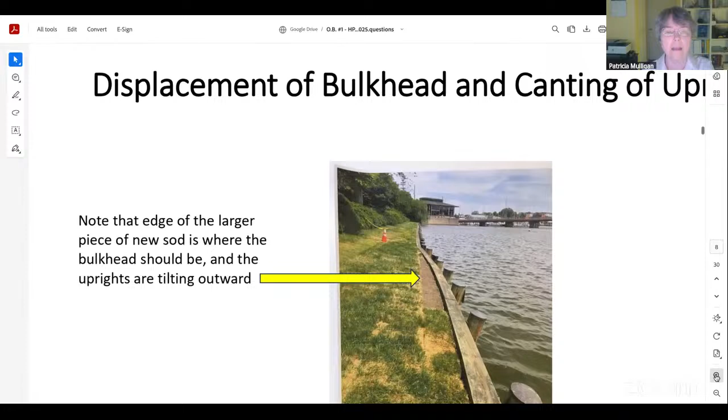Just showing more, we can see from the edge of the sod how far out that bow has moved, because the bow should be back next to the edge of the sod. This tilting outward is caused by the snapping of the tiebacks that come out of the uprights. I think the last inspection, done in September—and Joe can speak to this more—estimated that half the tiebacks have snapped. Let's come to the next.

Now we're in August. Here's another West Bank flood picture. You can see where the bulkhead is there. Let's keep going—I really want to get up to the most recent pictures for discussion.

Just the bow is worsening, the uprights are canting outward into the water. Here's the West Bank bulkhead. Now, when we began this project, that was perfectly straight. But between '22 and '24, we started to see slight bowing even on the western bank, with erosion behind the wooden bulkhead. It's alarming because we've seen that degree of bowing on the other shore two to three years ago, so we know it will increase. Can we come to the next, please?

I don't mean to belabor this because it's shown better in later pictures, but just showing the difference between '22 to '24. Can we come to the next, please?

This work was done in September. I noted to the order that there were 2 more bowed sections on the northern bank, closer to the bridge. My concern was they're starting to look like the worst bow we have now did in 2022.

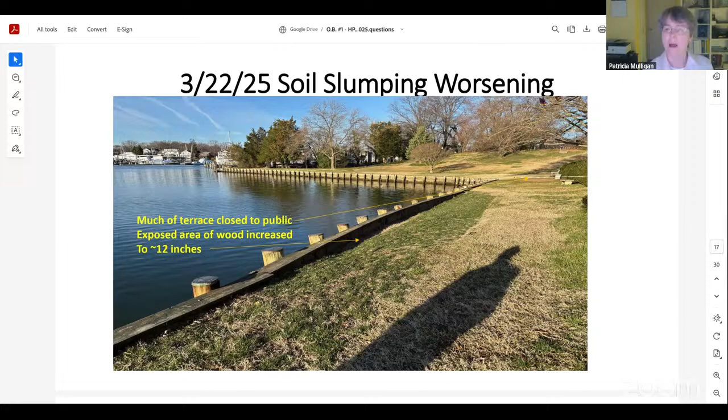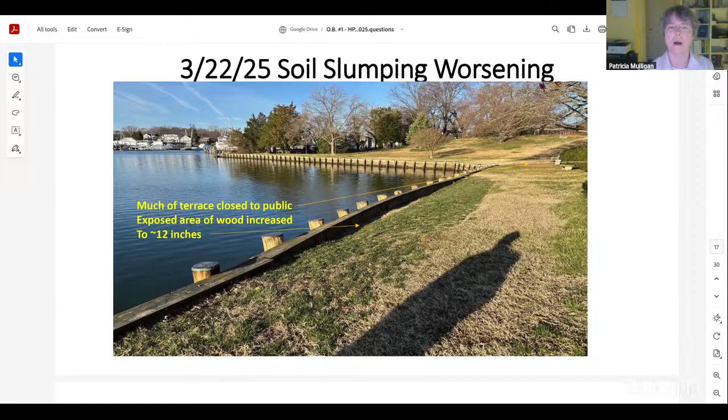I don't know if there's any reason you would like me to go over the backup charts. I think they should be explanatory. I'm seeing no's, so I'm not going to take up your time to do that.

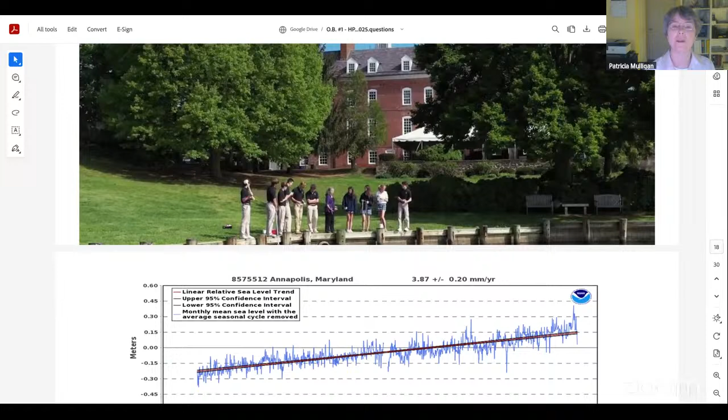I just point out that students used to stand on the bulkhead in the environmental sciences classes to do water sampling, catch fish, measure the fish and then release them back. They don't do that now. We've closed the bulkhead to the students. There's police tape up over part of the area. We've closed it to the public too, because we're worried about it continuing.

So it's not necessarily to be surprised. So if there are no questions about these charts or about the background, I will stop talking and let Joe take over talking about the oyster establishment.

Before we move on, let me clarify one thing. Mr. Berg is only going to speak about the oyster reefs plan for the oysters, correct? Also a little bit on the planting plan, but that is still extremely preliminary. If you want to hold that off until we're more permanent, I'd understand.

Otherwise, I think Joe has the materials on the oysters.

If you want to talk about the planting plan, it's so preliminary, I would encourage you to be very brief. I also want to thank you for the photographs - they're very helpful, very valuable for us to see. But there is no debate, I don't think, among the commissioners or the staff that something needs to be done to preserve the shoreline. In all the time we've spent together, I've not really heard you address the relevant parts of the guidelines, and that is crucial to our approval process.

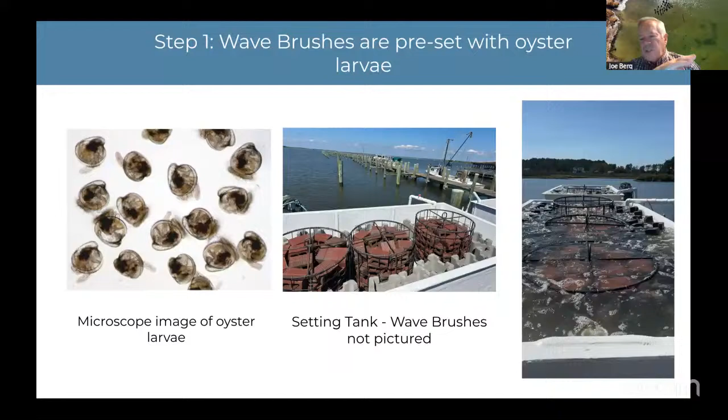This is the setting tank at Hooper's Island. You see they put the substrate that would be set with oysters in the tank, then they put the oyster larvae and water in and agitate it to keep the larvae alive. The oyster larvae glue themselves to these substrates, which are then harvested and transplanted. You can go to the next slide.

This is just a little bit more info. We're using a marine contractor we've worked with before, and they strap these wave brushes, which you haven't seen a photo of yet, and lower them into place - that's really how they're installed. All the work is from the water on a barge, and the barge is not up against the bulkhead because this is a long reach excavator. Next slide.

These are just a couple of photographs of this wave brush set with oysters in Virginia, where the oysters can grow above the tide, as long as it's not above the high tide. Next slide.

One more, I'm sorry. So it looks like this is as far as it'll let me go. I'm trying to scroll down past this. Well, that's okay, you can exit this. I don't know if there is another one.

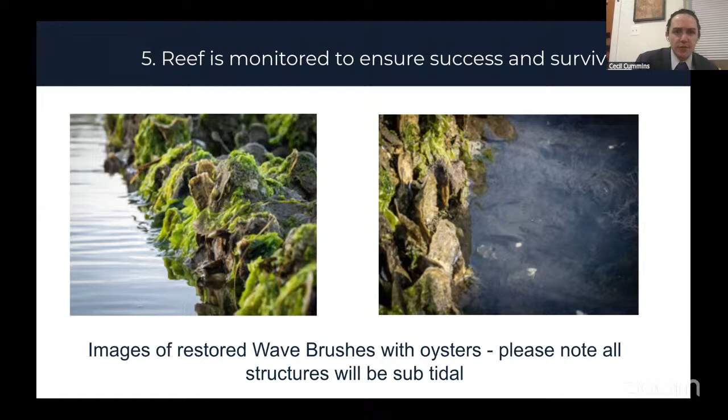I think you're right, I think 5 is the end of it. If you can close this out and open the wave brush, it's a single image.

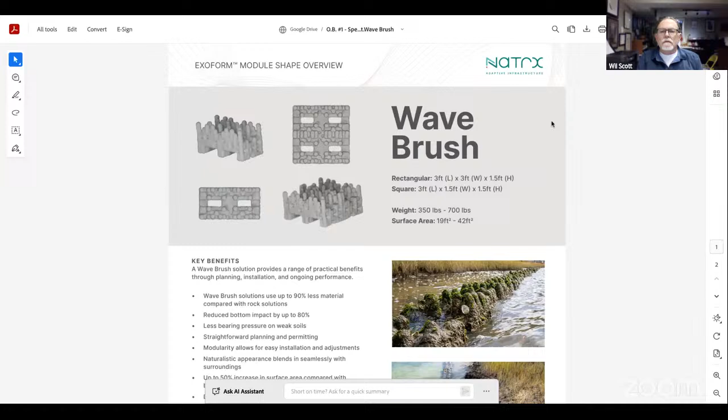While we're waiting for that, Mr. Berg, again I think that this is all very useful and important for us to evaluate what your final proposal will be. But my real question at this point is: is the installation going to not disturb the historic shoreline and shore itself? And is what you propose for the oysters going to remain invisible during all normal water conditions? Yes.

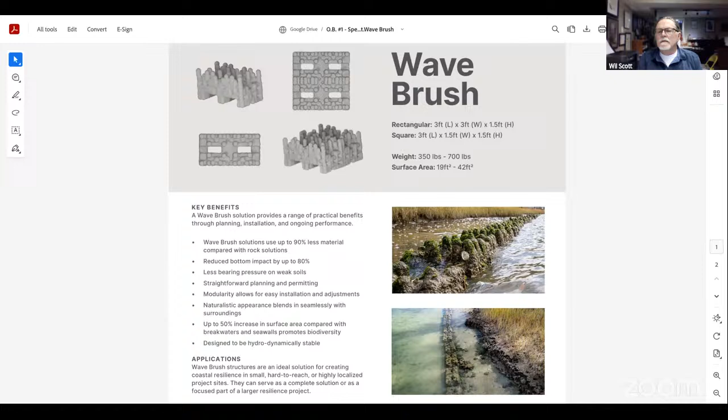Quite an audio delay here. For oysters to establish well, we don't want them to be within 2 foot of mean low water. We want them to be deeper than that. Just like us, they don't want to be freezing in the winter. Yeah, so it's important that that's good.

Somebody probably has two things, Joe, I don't know if you have it on your phone and on the computer or something, but there's probably 2 microphones picking you up at the same time. Cecil, I cannot tell, it's actually only Joe's it's happening on. So somehow Joe has double audio. I think what he also hears is the source of the echo. And Joe, that's usually caused by 2 microphones picking you up. I don't know if you have it on your phone and computer or something. No, I just have it on my computer. Wow, that's, yeah, so no one else is having this echo.

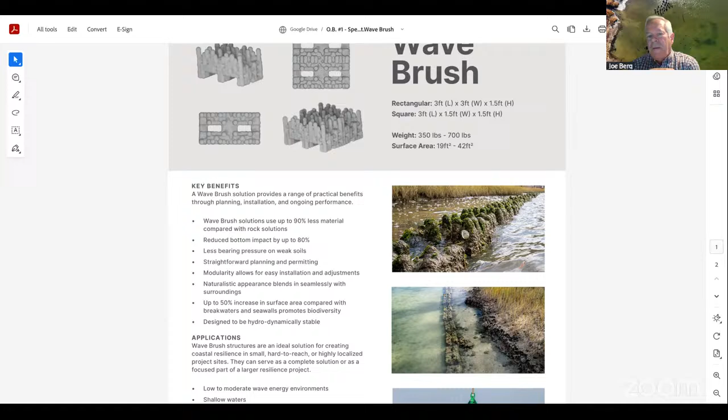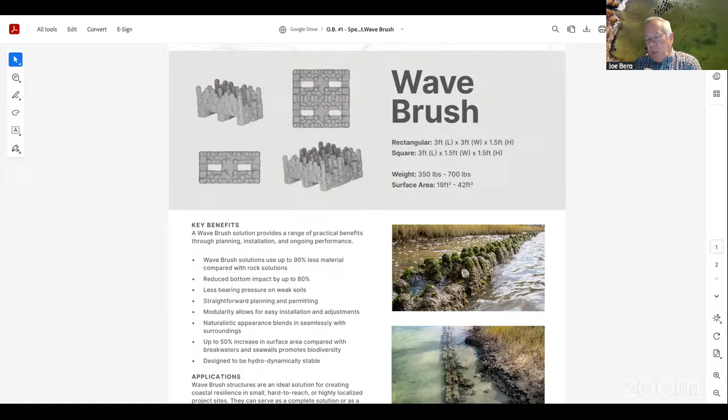The top of this slide shows what these wave brushes look like, and there's some details there: their size, their weight. The beauty of these structures is rather than just being a simple rock on the bottom that's a hard surface the oyster can set on, these structures have a third dimension. They're 18 inches tall with these almost hoodoos, if anybody's been out west. So you get a lot more surface area for the oyster to set on.

So over time, when the oysters survive and they spawn, the revetment that these structures are placed on, which is all rock, will become encrusted with oysters. So the long-term...

Structure of the shoreline. I've been removed, huh? No, I hear you, I see you, Joe. Okay Joe, I just heard what the issue was. You had been signed on twice somehow, removed from the webinar by the host, so as long as you can still... I'll just ignore this.

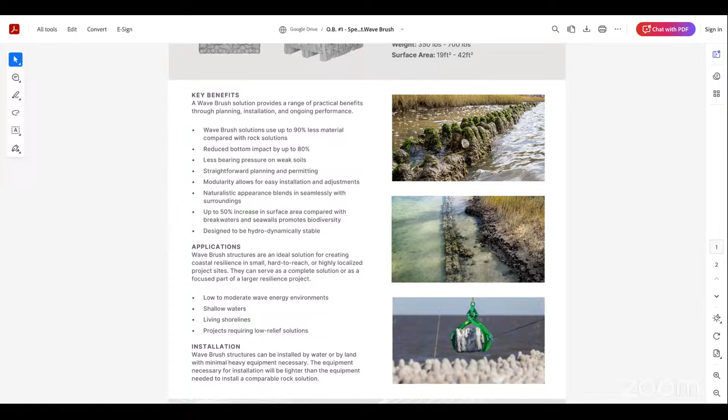I won't, Mr. Berg. Yes, there was 2 sign-ons, I just removed one of them. You're still in the meeting. Okay, that should get rid of your echo though. Oh that's great. Oh, pardon me. Oh, here I am. Okay. Pardon my language. No problem.

The beauty of these wave brushes is you get this third dimension, so a lot more surface for the oyster to set to. And then once these spat-set structures are placed on the rock revetment that is holding the bulkhead in place so it doesn't continue to rotate out into Spa Creek, as spawning proceeds, that remaining rock will be attractive hard surface for spat to set on. So over a decade or so, we would expect to see encrustation of the total revetment below.

We're saying minus 2.5 foot, which is 2 foot below lower low tide. That way it's not like they're sticking up like they do in Virginia. They'll all be underwater, but that rock revetment is now, instead of a bunch of loose rocks that are just held in place by gravity, they'll be cemented together by oysters. So it's a long-term solution. And oyster reefs, of course, support fish, support a lot of other organisms.

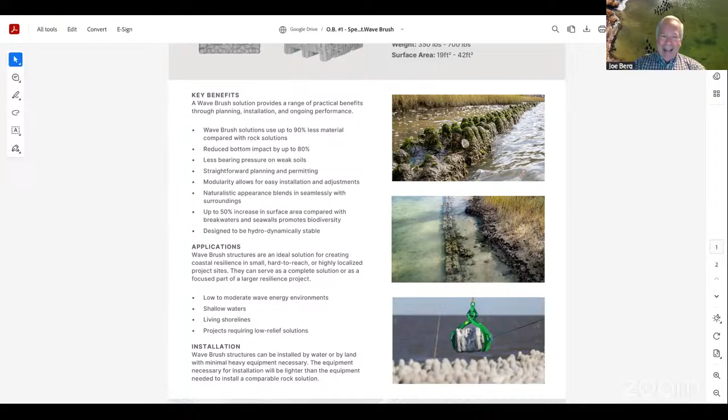It might be helpful if you have patience for it, it's like 7:58. So I know 7:39 is sort of a target, but I'd be happy to do a quick run through on the planting plan, which is the PDF that's in there.

I will defer to my fellow commissioners, but as I said a few minutes ago, if you're still going through a lot of decision making as to what the plan should be, I would really save that until you have something that all parties on your side have agreed to.

Well, so just in response to that, the structural elements of this project have been permitted by the Corps of Engineers and have been approved for permitting and submittal to the Board of Public Works by the Maryland Department of the Environment. So the design is the design.

But the planting plan is something that Pat and I have been going back and forth with, and we respect the membership on your organization, and we were actually going to inquire about what the preferences would be for both demarking the alignment of the historic seawall, as well as we know that the shrubs that have been planted there for a long time are dying now.

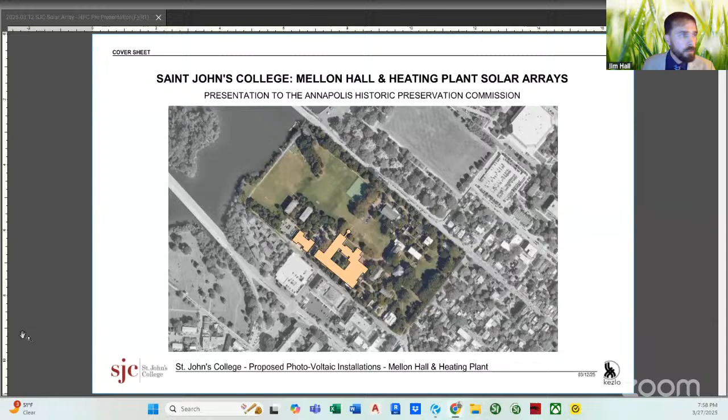Okay, let me get my screen shared here. And if everyone can see my screen currently.

Thank you very much for your time. We greatly appreciate this opportunity to speak with the HPC commissioners and staff about our proposed project, involving photovoltaic arrays on top of two separate buildings at St. John's College, Mellon Hall and the adjacent heating plant. My name is Jim Hall, project architect with Kezlo Group. With us we have Ali Gontang Highfield, Vice President of Finances and Operations and CFO at St. John's. John Davis is also joining from St. John's College, Director of Campus Facilities and Projects. Also joining is Jason Winters, Principal Architect at Kezlo Group, and Dante Balasone, another project architect at Kezlo Group.

We're excited to present to you here today as a pre-application, and looking forward to discussing your thoughts on our proposed project's feasibility, and any recommendations for additional information we may need for our submission for public hearing. Right now our targeted plan is to move forward for a presentation during the June 10th public hearing. That is a bit of a moving target for us; we have a couple other items trying to get lined up, as we'll talk about further along in this presentation.

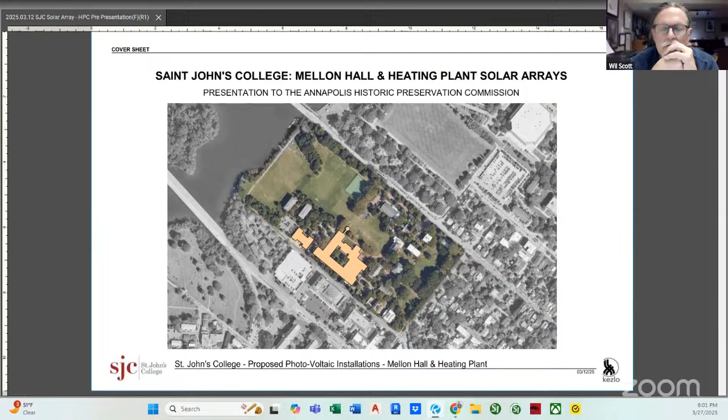At this time, I'd like to hand the presentation briefly over to Ali to introduce the project a bit and St. John's impetus for the project. I'll be very brief, and then I'll turn it over to the capable hands of Jim Hall.

As you mentioned, we actually did present this as part of our Mellon Hall renovation years ago, back in 2021. We did remove it at the time. The cost was really out of our reach at the time, but we recently had the opportunity to apply for a grant from the Maryland Energy Administration. So we did submit for that grant, and we were actually awarded it. All of this is obviously contingent on the approval from the city and the HPC, as well as MHT, since it's a state grant. But we really appreciate your time and effort.

The city's been wonderful partners to the college, and we're very excited at the possibility of reducing our carbon footprint and adding some sustainability features so that it'll help us with our very large utility bill. It will help us with recruiting students. All of these things are wonderful things for the college. So we're very happy you're helping us with this pre-application, and I'll go ahead and turn it right back to Jim Hall. Thank you, Ali, appreciate it, and thanks for the sum up there.

As Ali mentioned, the MEA grant that was awarded was specifically to fund the two arrays we're talking about here, but that doesn't mean other clean energy initiatives aren't being considered around campus. The grant actually comes in three parts: the design of the array being one component, a student internship program being another to allow St. John's students to learn about solar design and clean energy. We're also developing what's called a campus clean energy master plan. The idea behind that is to identify other potential clean energy initiatives that may be appropriate for St. John's, which could include a solar array installed somewhere else on campus, or a geothermal well, or any other kind of clean energy initiative. We're in the very beginning stages of that process.

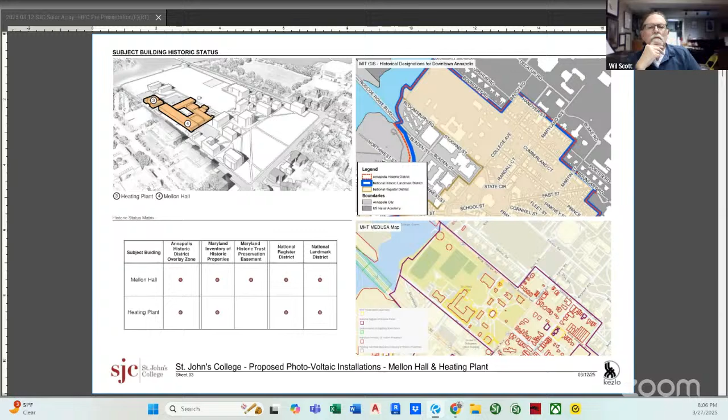On these next few sheets, we wanted to outline some of the guidelines and standards that appear to be governing this proposed project, basically a rooftop array on both buildings. Obviously, we'll be focusing more on the ones centered for Annapolis, but understand that being in the historic district, both buildings are subject to the Annapolis Historic Design Manual and Guidelines, which then references the Secretary of Interior standards for rehabilitation.

On the Maryland Historical Trust side, their easement process focuses more on the Secretary of Interior standards for the treatment of historic properties. A lot of these documents have very similar language and very similar requirements regarding rehabilitation and other preservation efforts. So some of these guidelines that we've listed here are duplicative or kind of repeat themselves, but I wanted to go over some of the pertinent items, looking forward to having more of a conversation on.

The first of which is what we call this project. It appears, looking through the Annapolis design guidelines and manual, that this would be called an alteration that would be sensitive to historic buildings and streetscapes. On the Secretary of Interior side, this seems to want to fall into the category of a rehabilitation, and I just wanted to get confirmation of that.

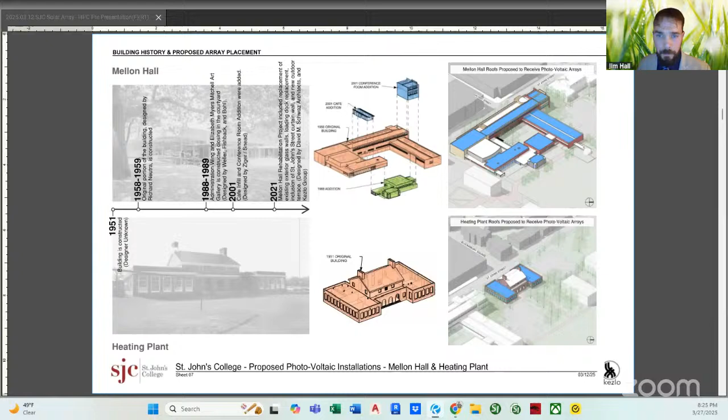There are several advantages to this. One is that we minimize the amount of penetrations through the roof membrane, which invites less opportunity for any future leaks. Additionally, the ballasted system places the panels on a slight angle, about 5 degrees, which is important because it creates a more optimal angle with the sun, allowing them to be more efficient. However, it also provides an opportunity to shed water.

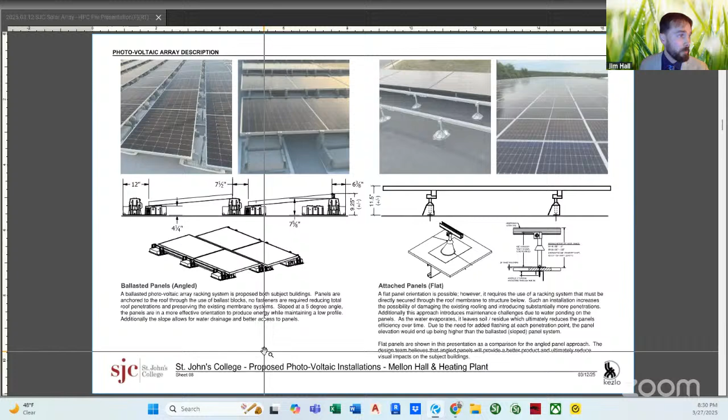Moving on to the other equipment associated with these arrays: from the rooftop panels, the direct current produced is fed through a series of metallic conduit. Those then penetrate into the roof or through the building envelope, down into the electrical room, where they're fed to a series of inverters. Those inverters convert the energy from DC power to AC power, which is then fed into the building or back out to the incoming service line through a combiner box, and ultimately to what's called a non-fused panel.

So the elements outside the building consist of the arrays themselves, some conduit and penetrations at the roof, and the non-fused panel. That non-fused panel is about 10 inches by 28 inches by 50 inches, and it's designed as a basic emergency shutoff. By code, it's required to be mounted on the outside of the building at grade and accessible at all times.

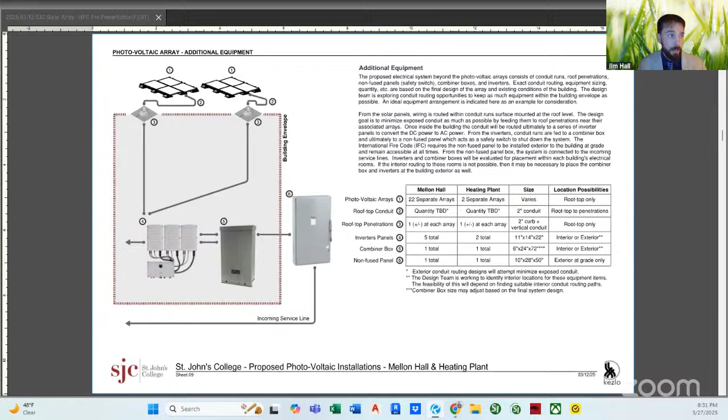So this is the proposed array at Mellon Hall currently. We're placing panels on some of the original building roof areas, as well as several of the additions. In total, this system consists of 22 separate arrays and about 452 panels. Using the ballasted system at that 5-degree angle, it's capable of producing roughly 300,000 kilowatt hours annually.

Does each separate array require those conduits and panels individually, or do they all flow to a central location? They would all flow to a central location. The conduits would need to be designed to interconnect these panels, and we're looking at ways to route them over the roof, drop them down as quickly as we can, then through the interior of the building to a mechanical and electrical shaft, down to the basement level where we're proposing this equipment goes.

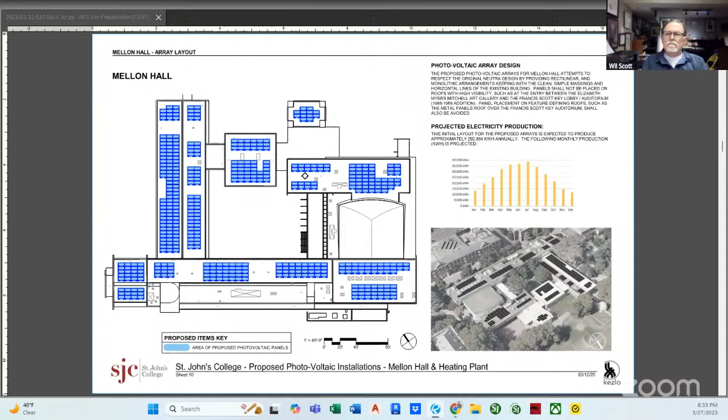And then lastly, there's a desire to place some array panels on top of the Mitchell Art Gallery as well.

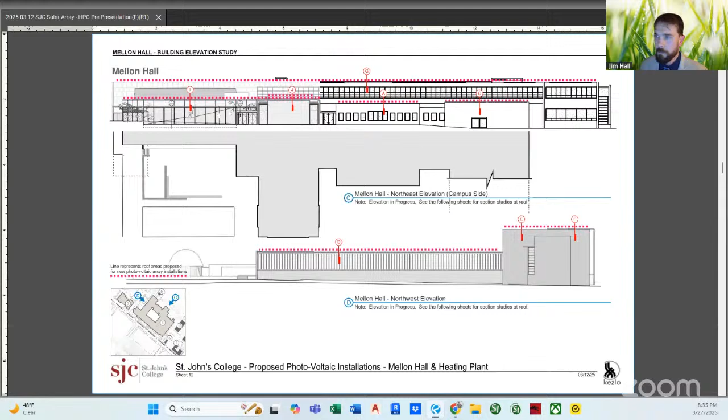This is where the study exists, talking about the relationship of the panels to the various different parapet heights. As you can see, as I mentioned before, the parapet heights range from about 6 inches in places to around 4 feet.

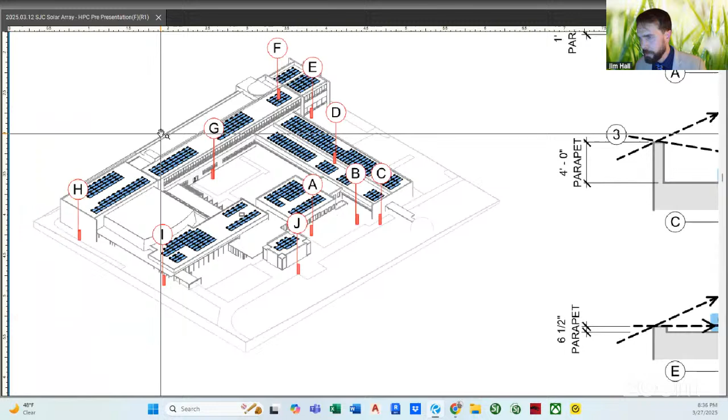I'll zoom back out on this slide, but I wanted to zoom in here to make a point. This is our array in each one of the locations that we've studied, and I wanted to point out that the array would only be higher than the parapet walls at locations E, G, H, I, and J.

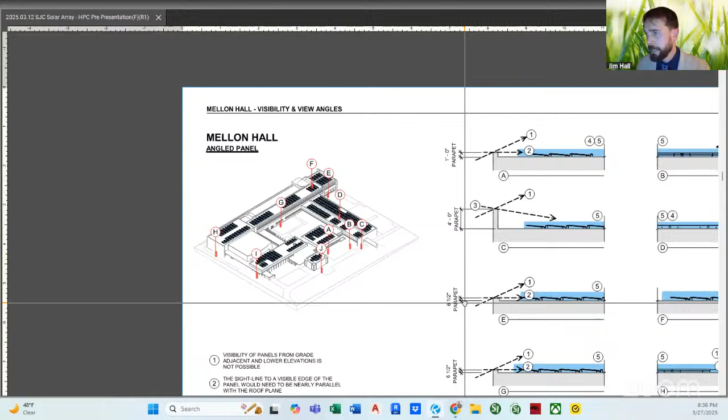That being said, I'll try to center that again. In each of those locations, due to the relative height of the array, you almost have to be level with the top of the parapet wall for those to become visible. In all other instances, the arrays are not visible unless you are much higher than those parapet walls.

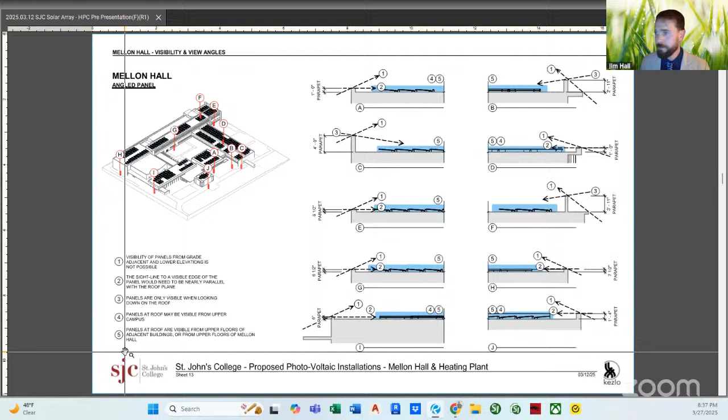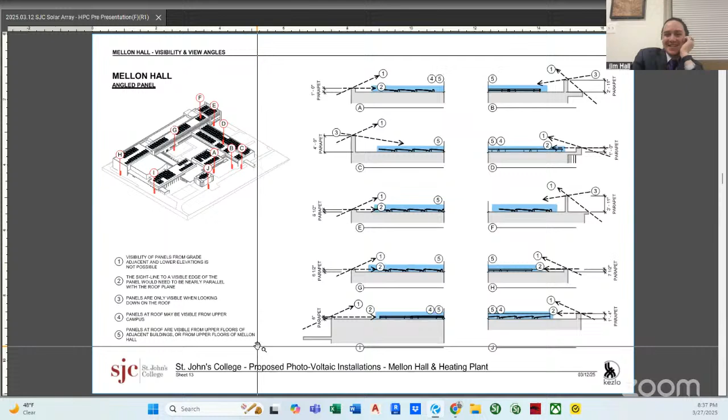Do you think you could keep them under 2 inches in height? I can try — I'm just kidding. I thought maybe that would make somebody laugh. No, it would certainly be nice, and we've looked at various different racking systems, but this is the lowest that we could find at the moment. I thought they were making photovoltaic films. Oh, absolutely, we could — I know they're making those. I don't think they're quite as efficient as panels yet, but they are out there. My comment was a facetious one, just to be clear, I was not serious. Understood, appreciate it.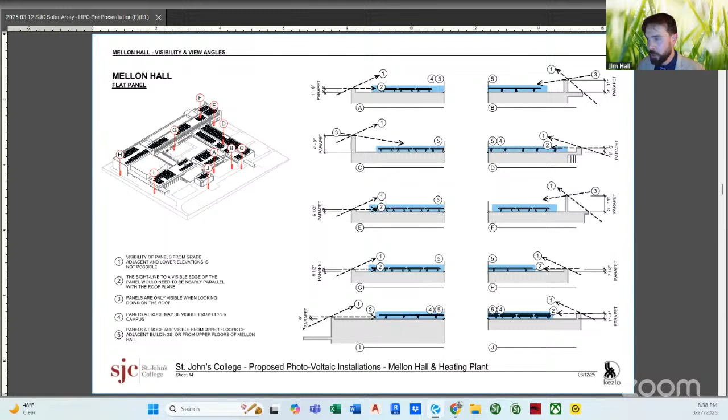The next sheet is a duplication of the study, but with the flat panels. I'll go back and forth a couple of times so you can see the difference here. The flat panels end up protruding a little higher, at 11.5 inches, versus the 9.25 inch height that the ballasted system utilizes.

Moving on to the additional equipment that's required for the design.

I'm just going to say that when you get to the point of making any future work session presentations or your final application presentation, some applicants have taken balloons on a string and positioned them so you can get a better sense. These drawings are very good and helpful, but sometimes that makes it easier to understand exactly what's going to be visible from ground level. Float the balloon, get a position, take a photograph. We see reference points we're familiar with that we're better able to connect to.

Are you recommending the balloons would be at the height of the array panels? Yeah, I guess it's tedious, but you get the top of the balloon exactly at the part of the array that's going to be above the parapet. Jim, it doesn't have to be balloons, you could do anything, orange traffic cones, so you can see them. Understood, makes a big difference. Okay, well thank you, we'll look into that, we'll see if we can find some visual. You got to find one under 6 inches, or 9 inches rather. That's right. You could call Commissioner Cummings, maybe a red solo cup, I'm sure he has some suggestions.

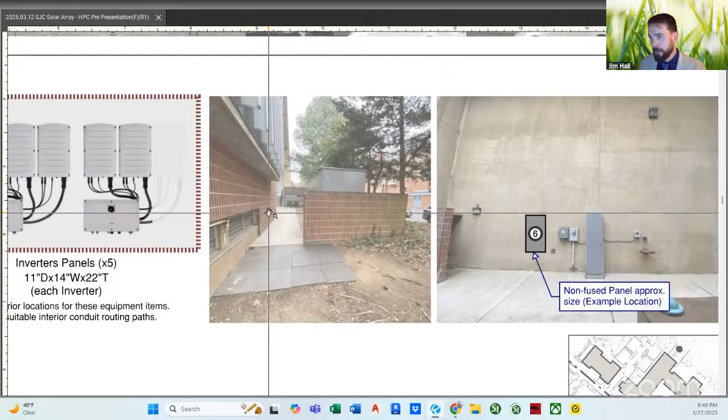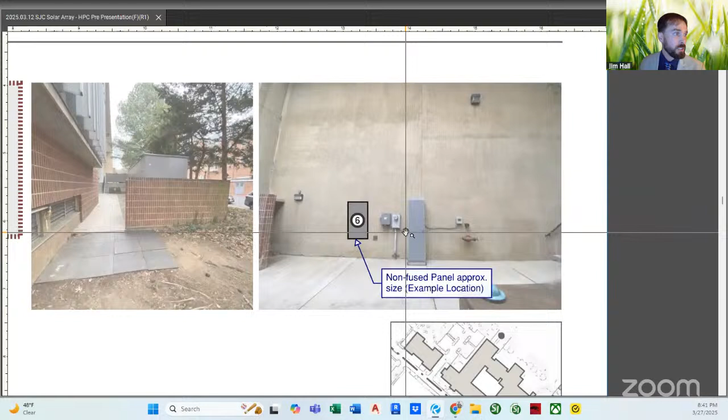And you're seeing at the end of this masonry wall is represented here at the terminus, that's the terminus of that wall here. The ideal spot for that location would be against this poured concrete wall, against some existing BGE equipment as well, and that's approximately the size comparative to the existing equipment. It's a good location. Thank you.

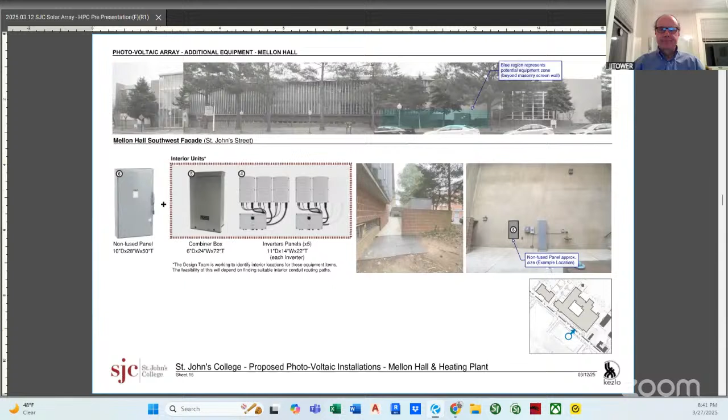That concludes the design for Mellon Hall, and now switching over to the heating plant. Heating plant, a much simpler array. We're expanding, ideally placing it on as much space as possible on those 2 flat roof sections. The 2 arrays involved would total about 104 panels and have the capability of producing roughly 70,000 kilowatt hours annually.

Again, these are in-progress elevations, but the idea is that it's only being proposed on these flat areas of the building, as you move yourself around the building from elevation point to elevation point, and the gabled roof remains untouched.

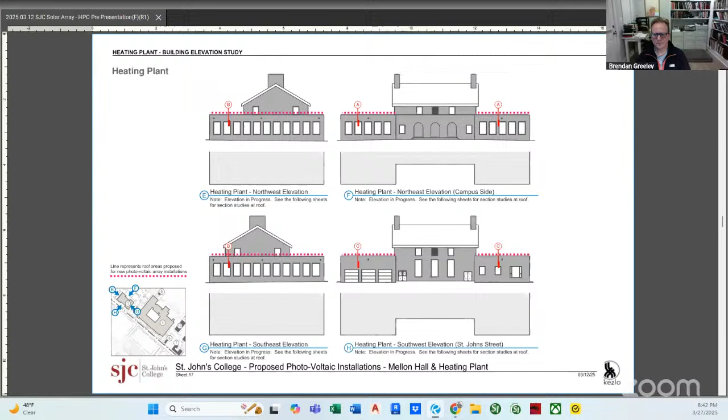I think doing what we were just mentioning, giving us some photographic evidence of the amount that would show above the parapet, would almost answer the questions about this structure. I agree, and what's nice about this structure is that we have about 3 feet of parapet wall height to play with, so no matter where we go, either the angled panels or the flat panels, both are only visible if you're up at higher elevations on adjacent buildings.

And what vantage points would those be, really? There's a sliver of a view from both Gillum and Spectre, and then across the street on the Calvert Street parking garage, as you get into that stairwell facing St. John Street. Those are the only locations we could find that you'd get that view down, or standing on top of the roof of Mellon Hall if you were ever up there.

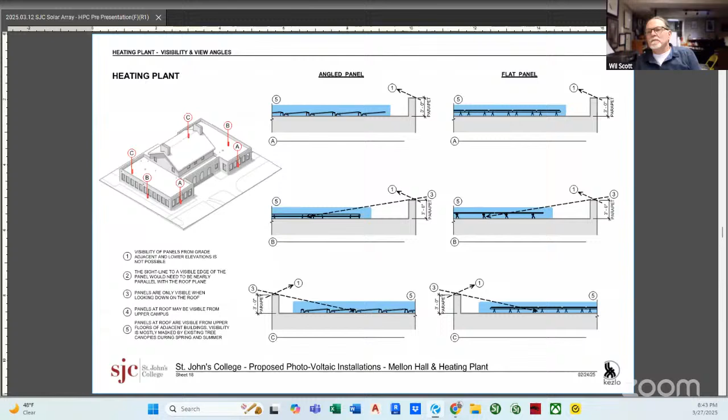But that's not the public way. No, it's not, not supposed to be. I'd be careful saying those are the only ones you could find, because there's going to be some neighbor that finds a spot where they can see something. That's true, we hope we found everything, but we're certainly open to the idea there could be other positions as well. That's one reason we have public hearings, so a neighbor can share that information. Absolutely.

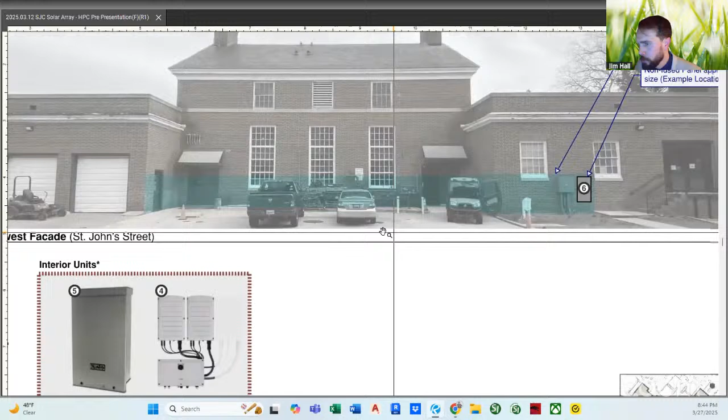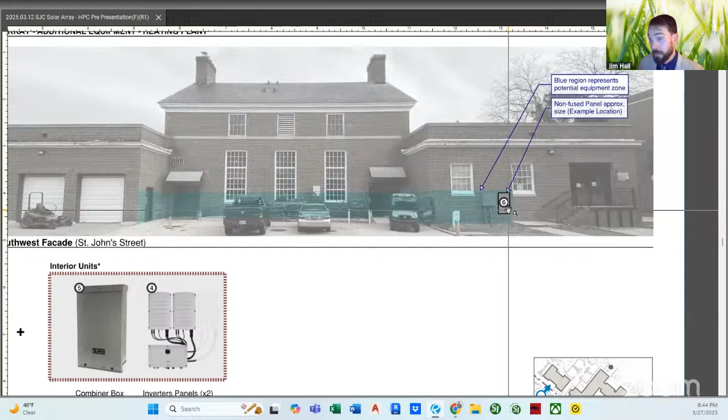Getting back to the additional equipment required at the heating plant, we're looking at a total of two inverters and a combiner box, both interior to the building, and then that non-fused emergency shutoff switch proposed along the St. John Street elevation. This elevation already contains some electrical connections and other miscellaneous equipment off the back side of the building. We felt that somewhere in this blue zone would be an appropriate place for that panel box.

So, Jim, are those historic pallets stacked up there? Very historic, John. Yes. Get your hands on them now, John.

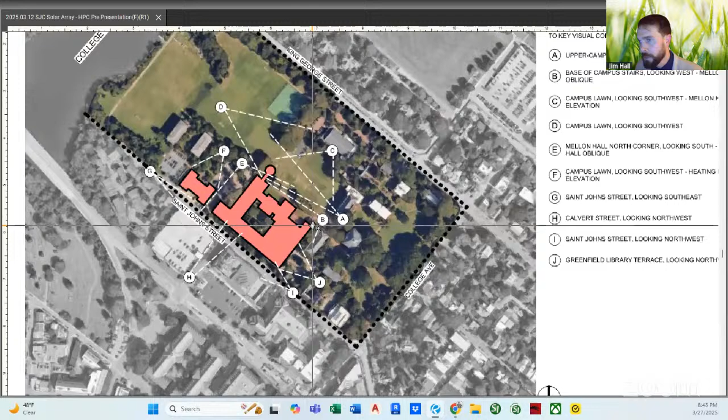Our next section covers what we felt were important view sheds around the buildings. Starting with A, at the upper campus terrace looking northwest, between McDowell Hall, what was Randall Hall and is now Fielding Moore Hall, and Campbell Hall, now Edensward. This becomes one of our historic views and important view sheds. Standing at the base of the campus stairs, looking at Mellon Hall at an oblique angle, is another view shed we felt we'd like to cover.

Moving to area C, across the street at Iglehart, looking back at the building. Area D, looking back from College Creek up at the campus. E is at the corner of the building along the main sidewalk, on the oblique. F is a walkway, not quite centered, coming off the main walkway looking right at the heating plant. G is located on St. John Street looking down. H is at Calvert Street looking back at Mellon Hall, and I is looking back down the other direction. We also flagged J at the terrace of the Greenfield Library, between Paca-Carroll and Edensward, looking back at the building.

So we've got some slides here to cover that.

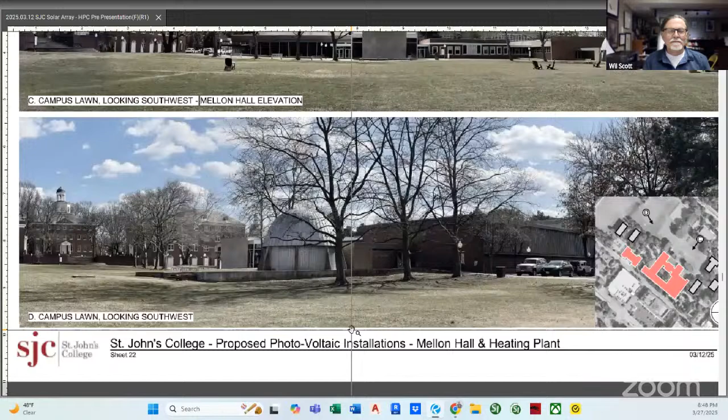Standing back here at area D, looking back from College Creek up at the campus, you'd have some array over top of the academic wing here. Again, this is the art gallery that's protruding a little bit, and you're seeing a little bit beyond the planetarium there.

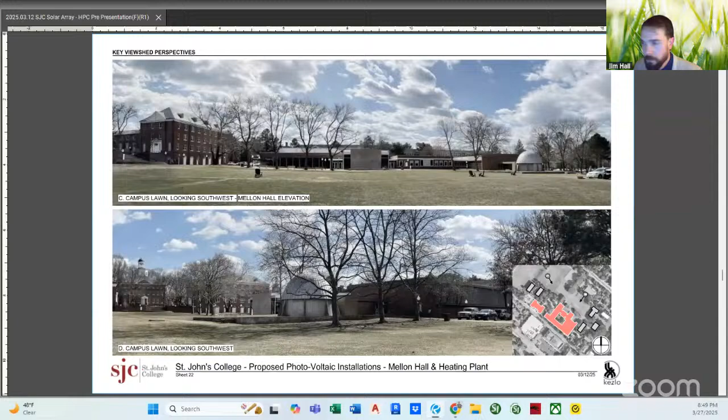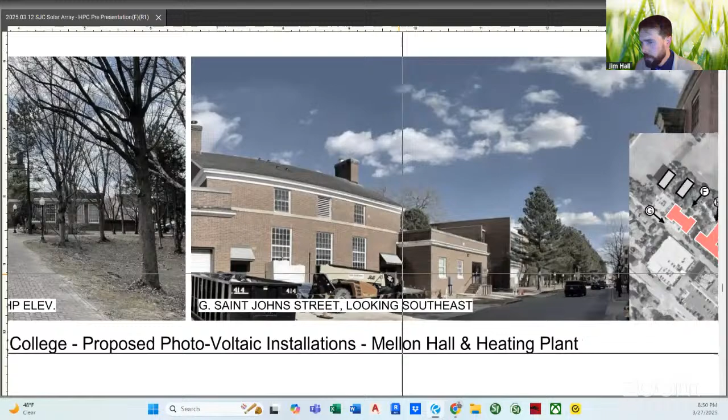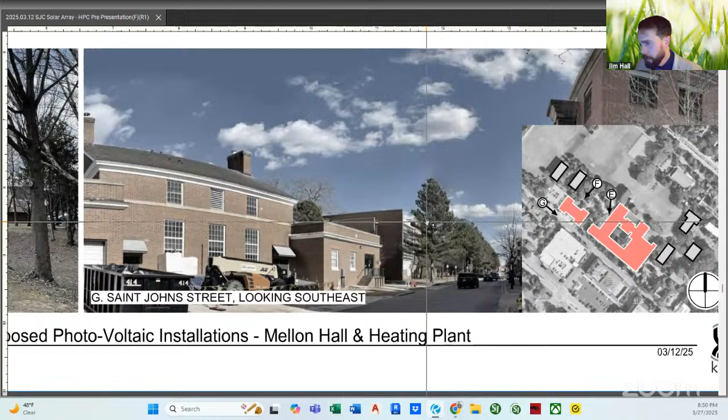This is, again, looking at St. John Street, the backside of Mellon Hall where those historic pallets are. You're seeing the 2001 addition here at Mellon Hall. This line of trees I wanted to bring up are evergreens, and they do heavily mask that facade as you're looking down that street.

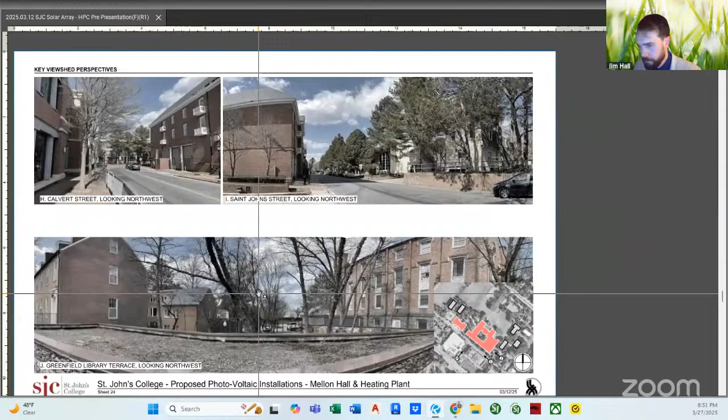And then lastly, this is vantage point J. I guess this is standing on top of that terrace, the Greenfield Terrace, looking out. You're seeing Paca-Carroll House on the left, and I believe this is Humphreys Hall on the right. But then through the trees, just barely visible, you're starting to see the outline of Mellon Hall there, the auditorium roof where we would not be placing any array panels. But again, this is, even with the leaves down, heavily masked by tree coverage.

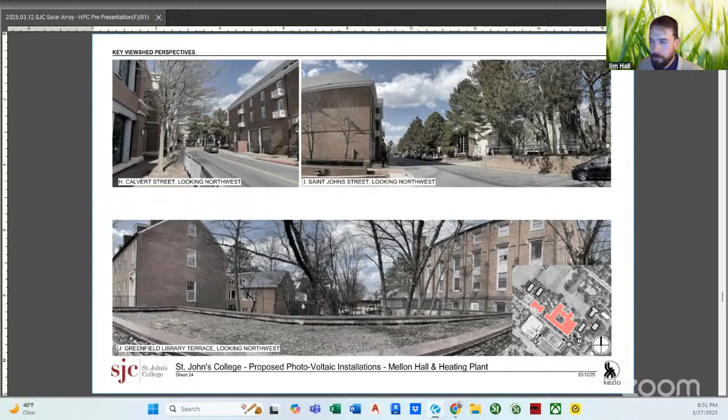The next couple of slides go over what we were looking at, trying to get up higher in elevation and look down on these roofs. We've identified a couple of these locations as having those vantage points.

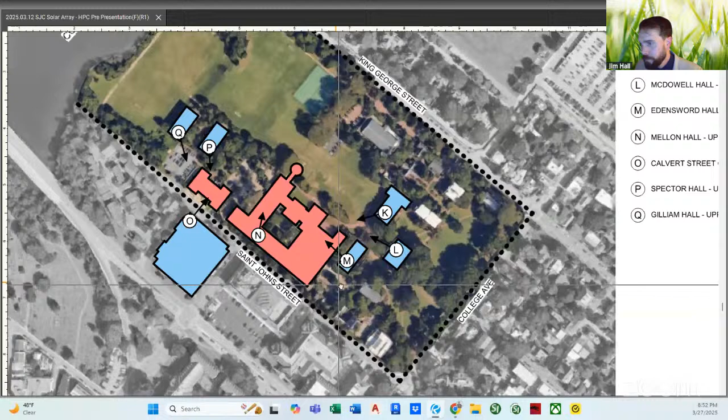Obviously, looking from the upper floors of McDowell, some of the roof of Mellon Hall, though heavily obscured, is visible. Again, over here at Randall Hall, which, like I said earlier, is now Fielding Rumore, looking at either the dining terrace or the upper floors, which are kind of student areas, not necessarily public areas, those views do have views of the roof. There is some coverage by the trees, but they do have some vantage points on that roof.

In Edensword Hall, the only place to view the top of the roof would be from within a student dorm room, and those are heavily canopied with tree coverage, especially during the spring and summer months.

We took some photos just to get a view of what it would look like, how much of the lower roof you can see from the upper elevations of Mellon Hall itself, and you could certainly be able to see the arrays at that point.

And then, like I said, this corner of the parking garage, due to some windows that are there, has some vantage of the heating plant, maybe a little bit of Mellon Hall, but most of that is obscured through the high wall that's along this edge of the parking lot. And then, as I mentioned, there's kind of slivers of views over here at Gilliam and Spector Halls.

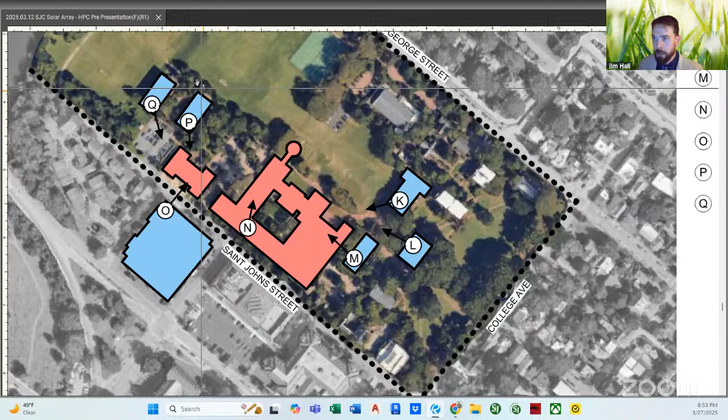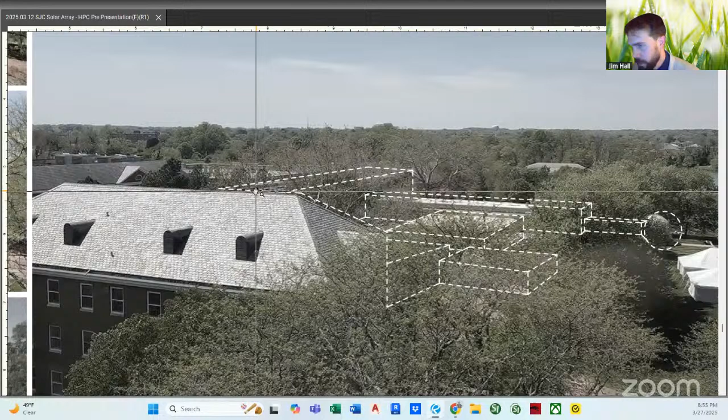In these views, we are at the upper floors of McDowell Hall. The main image you're seeing there is from one of the classroom spaces. We've had to outline this a little bit. Again, this is taken in the summer, but a lot of that roof is masked. But you would likely be able to see some of the top edges here of the academic wings, and maybe some of the administrative portion of the building as well.

These are some other examples from McDowell taken at different vantage points, including at the Belfry. So even at the Belfry, it's a little hard to see where we're at here, but these are the lower roofs here at Mellon.

The next slide, the main image here is looking out through one of the student areas at Edensword, up the upper floors. And again, it's entirely masked by tree coverage in the spring and summer months. We were able to take some shots down, and this is one of the higher terraced areas between this building and Randall Hall. But we took it where the leaves were down, so you could begin to see how far up, in relationship to the roofs, you were at.

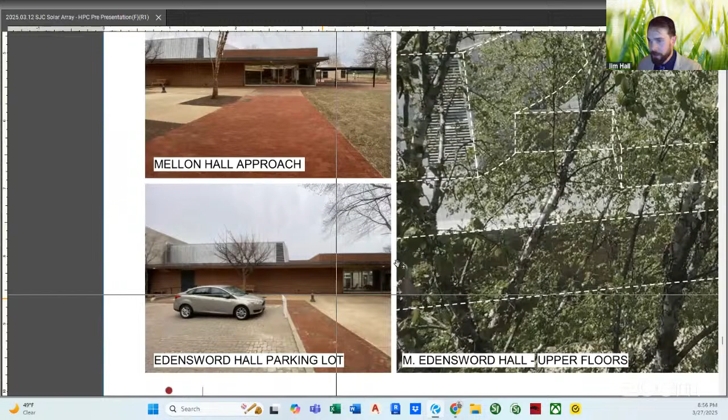Lower down, between Mellon Hall—and I know this isn't higher elevation—but just to get something that would be visible from Edensword or Campbell Hall there. This is between Campbell/Edensword and Mellon Hall, and moving further down a little bit. So again, the array would only be positioned on this roof here, and would not be covering any of this roof area over top of the auditorium.

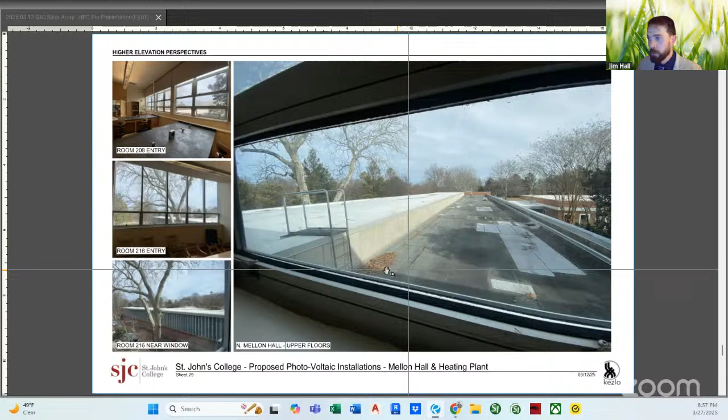This is taken from some of the classroom spaces within Mellon Hall. So you're looking at a second floor classroom looking out over top of the first floor classroom. So they would certainly have a very good view of the arrays as they'd be positioned there, and some of the academic wing as well. And that sort of occurs throughout the upper floors of Mellon.

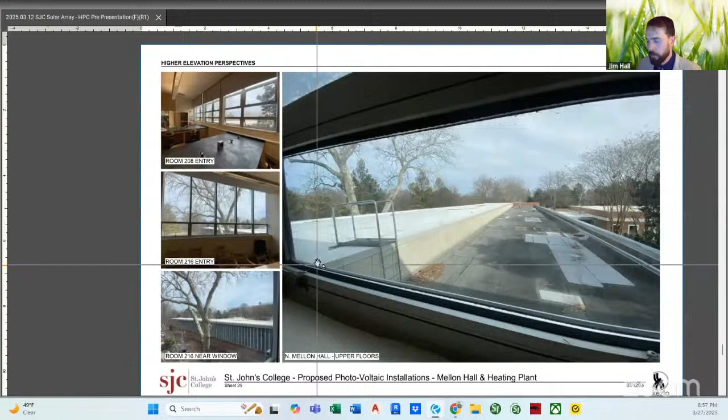This is from on top of the parking deck across the street. And again, from that stair tower, we were able to take a shot that looks down on the roof at the heating plant. If I zoom in on these images, that back wall is the wall—you're seeing the very top of Mellon Hall there, just above. If I stand far enough away from that wall, you begin to see the top of the building. And if I look back over at the heating plant, the only thing you're seeing is the top of the gabled roof at that vantage point. So really, you need to be at the wall, holding the camera up above your head, trying to get a shot there.

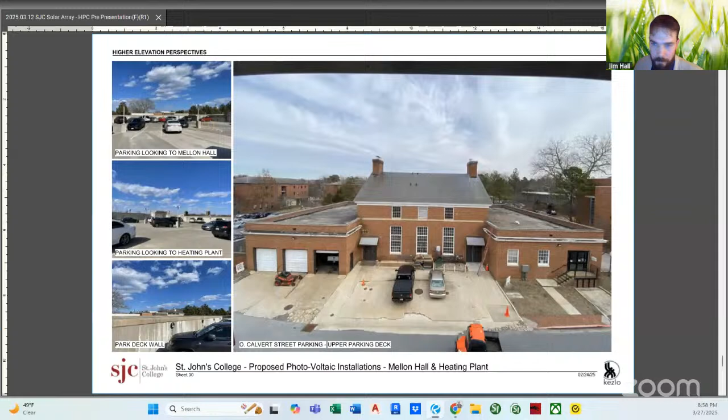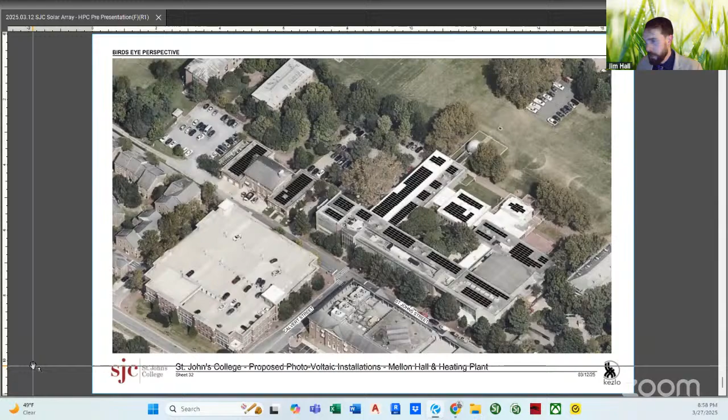And then lastly, we wanted to close with an overview of both the arrays side by side, in the greater context of its immediate surroundings. What I did want to mention was that across the street in these government buildings, there is an existing array that's there—obviously much smaller, but it certainly would be in the same neighborhood as that array.

With that, I'll pause here. I think it's a good slide to end on anyways, and we can certainly open up the floor to further conversation. Dante also has another package of information if anybody's interested on the size of any of the individual array sections or how many panels are proposed in any of the sections.

Thank you for the thoroughness of your presentation and the way that you address the relevant aspects of the different sets of guidelines. Because I was familiar with the first presentation a few years ago and the thoroughness of your presentation, I don't have any questions, and I would, in light of the hour, suggest that we remember what our real decision tonight is: is this a feasible project? So I think if you keep that in mind, any questions for clarification or further information should be addressed to the applicant now.

John Tower, is there any staff comments? Well, I certainly have comments. The first statement I want to make is that I think the array that we have on the parking garage, the Hillman garage, is very successful, even though there were a couple of blips with regard to the design. Now that is visible, if you want to see it, from certain public ways, Duke of Gloucester Street being the primary view, but I have to say it's innocuous. It looks like a roof structure, which brings me into my actual question.

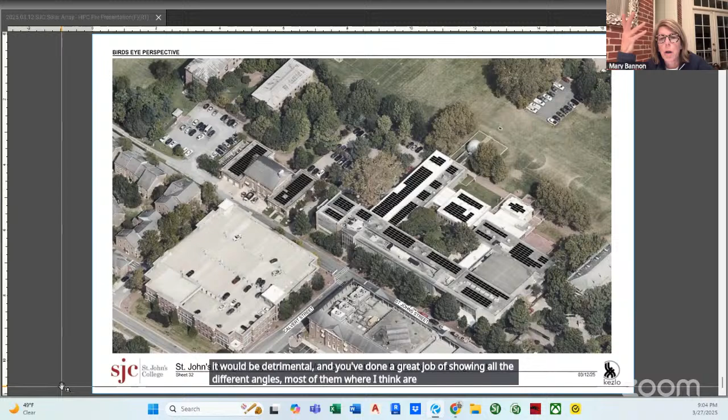You also did a great job of showing all the different views. As someone who is on St. John's campus almost every day with my dogs, I think there are a few very critical views on the campus where it would be detrimental, and you've done a great job of showing all the different angles, most of which I think are not very impactful. But at the upper campus, when you're walking down to the field and going down those stairs, that's really, in my opinion, the most important overall feeling a person gets when they go to the St. John's campus and you are on the upper level. So I wish there was a way that you could show just those main views where you're higher and looking over the whole campus.

Appreciate that. I can do it with balloons. Balloons, yeah, that's what balloons are for. If there is, either if you do that and it's like, oh, you can see this one right here, then I might be in favor of removing one or two of the smaller, more forward-looking ones.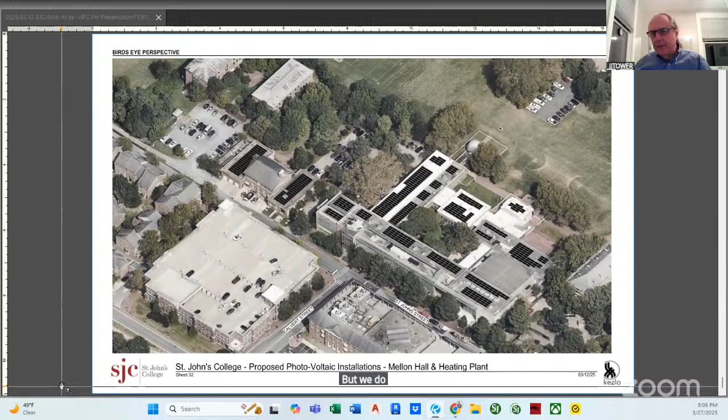But maybe you won't see those at all. I'm not concerned with the little minuscule views from this floor or that floor or from behind the heating plant, but where are the most important critical views of the feeling a person gets of the beauty of the St. John campus? So, we do want, Jim, in certain areas, to have that—not necessarily balloons, but something physically obvious, so the campus can be walked and we could take a look at it, over maybe a couple of days.

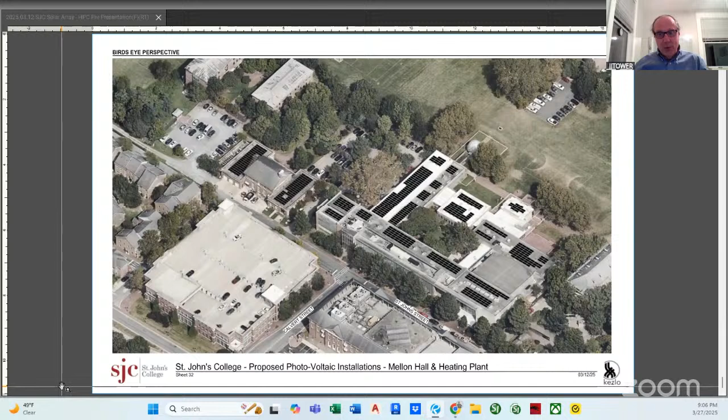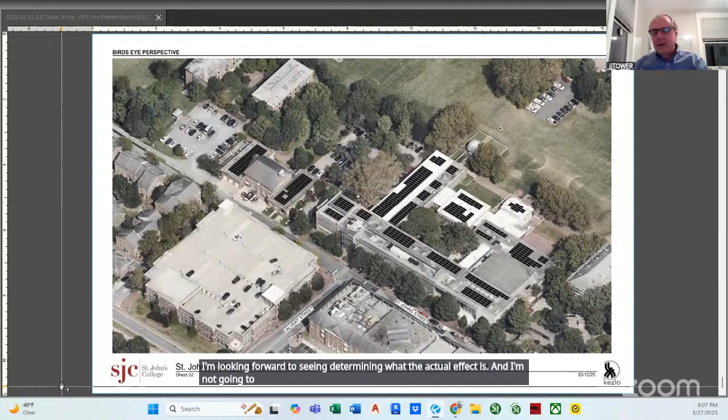Yep. This is, as everyone knows, a landmark building, a very important building, and I think Kezlo Group did a very nice job with the renovation. There were a few things I disagreed with—I was voted down, but I'm over it, kind of. Anyway, I'm looking forward to determining what the actual effect is, and I'm not going to judge this on the basis of letting a small matter get in the way of the greater good. But it has to conform with guidelines.

Appreciate that. I just wanted to say thank you for your presentation. It was very thorough. As a major fan of Richard Neutra, I think he would approve of this, and I think it is feasible. Thank you. Thank you.

Cecil? Yeah, I just wanted to again echo—it's extremely helpful when every single question you could have is answered in a presentation. So thank you for that.

I would say personally, I don't even care about the balloons at 9 inches—I don't even know that would be a big difference. But obviously, I think that will be an important component, specifically to Mary's comment, from some of the very clear, prominent viewpoints. And if you did that and it was very prominent, maybe just take one row away. I don't know. Again, to John's point that you just made, I don't know that changes the project.

That is worth noting, Cecil. That is what I was thinking—in an area where it became prominent, maybe it couldn't be in that spot, and it could be redistributed to another area. But personally, with the exception of having to actually walk down there or potentially see the balloons, from the pictures you guys shared, I think this layout is great. So my only comment was just clarifying that it would only be done on flat roofs and nowhere else, and I don't think there's any plan or desire to do it anywhere else from the very thorough presentation. I don't know if that matters at all, but I thought that was an important notation. So that was it, and I do think it's feasible.

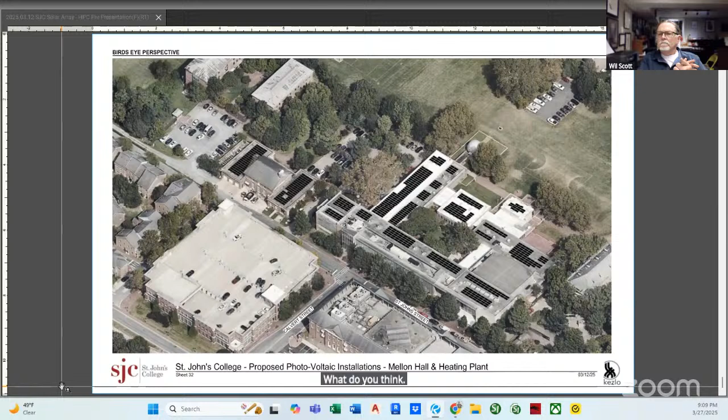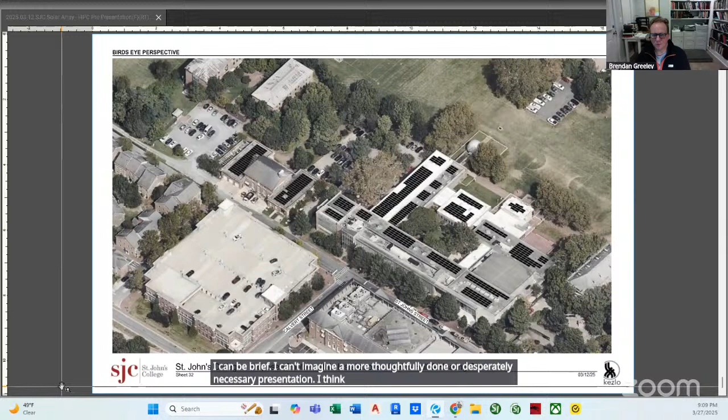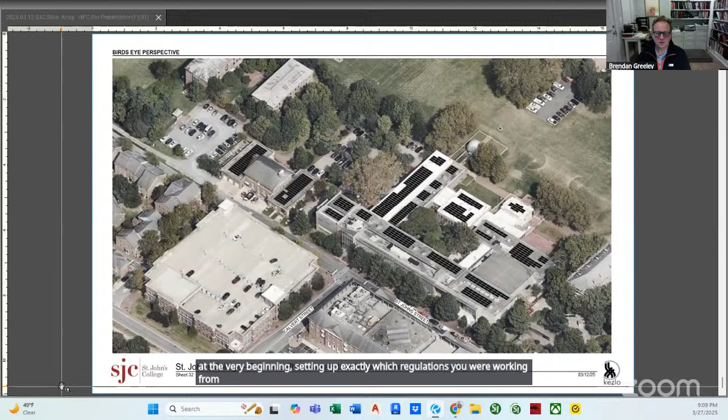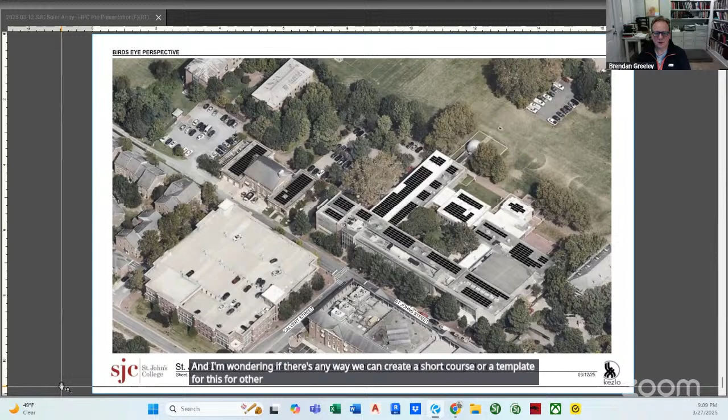I can be brief. I can't imagine a more thoughtfully done or desperately necessary presentation. I think in particular what I appreciated was your time at the very beginning, setting up exactly which regulations you were working from and possible other interpretations of those regulations. That's massively helpful. And I'm wondering if there's any way we can create a short course or a template for this for other applicants, because it's important, as Cecil pointed out, to anticipate questions and answer them. So thank you for the thoroughness of this proposal, but I just can't imagine having any objections right now. Thank you.

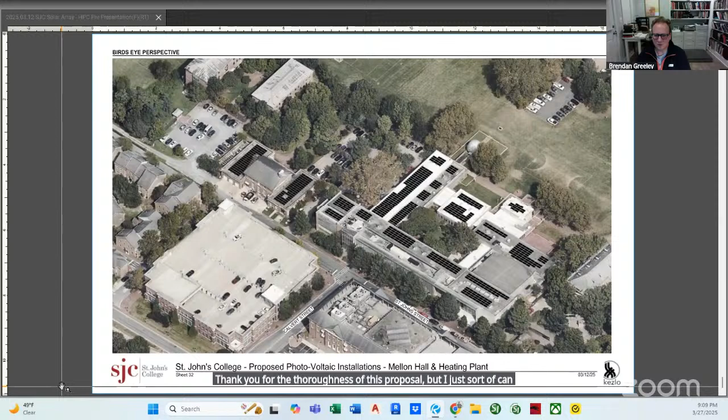I think you've heard from the commissioners, and we're unanimous in saying this is a feasible project. And I would emphasize again what Commissioner Bannon said, because I think that's the only thing that would make me change my opinion about this—if all of a sudden you did that examination with something to give us a real sense of what could be visible from those key vantage points. And I think there's a solution, and a number of the commissioners have mentioned it—maybe just removing a few or repositioning a few panels. But overall, this was an excellent presentation, and convinced me this is a feasible project. Thank you so much. I appreciate it.

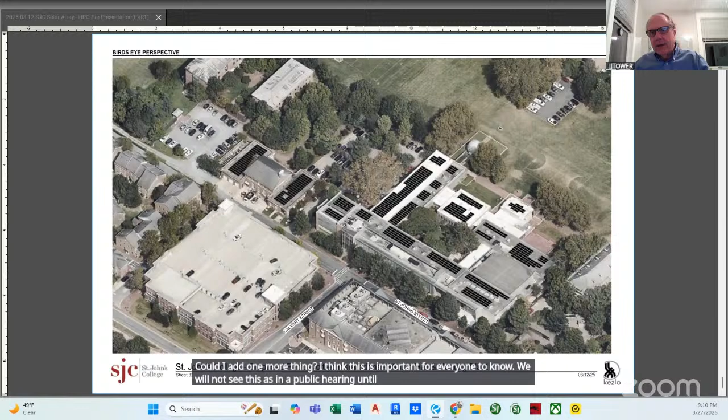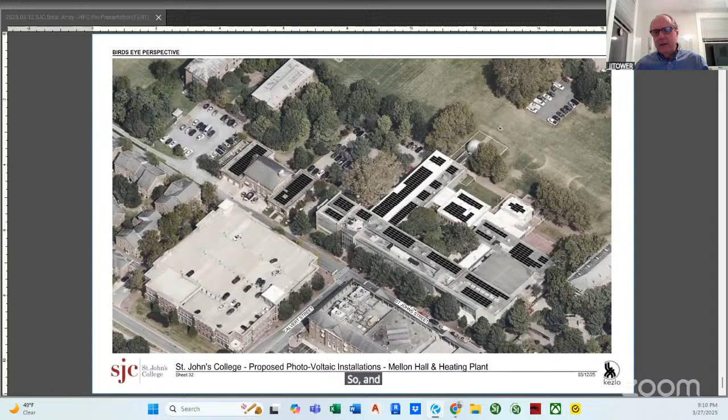Could I add one more thing? I think this is important for everyone to know: we will not see this in a public hearing until the Maryland Historic Trust has given at least conceptual approval. The architectural team is aware of that, but it won't advance to us until after Maryland Historic Trust has given its tacit approval.

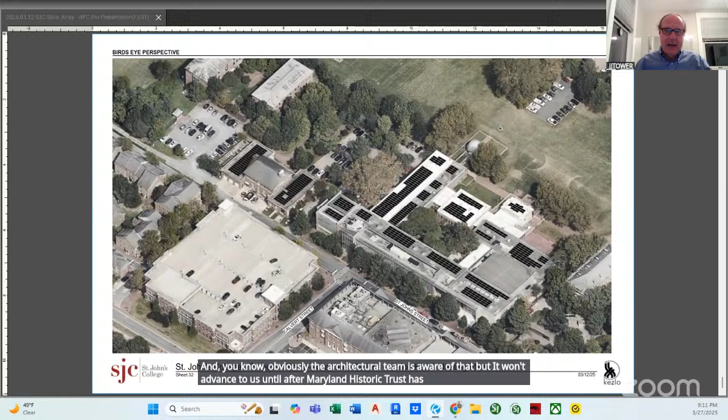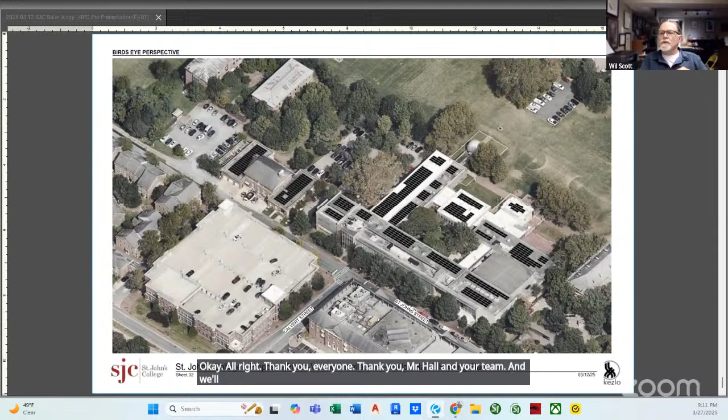We do have a couple more items on our agenda. Oh, sorry, yeah, you can't go that fast. I don't even go that fast.

John, do you have any new violations and status of active violations you want to discuss with us? Well, I have one violation on Pinckney Street. It's a bit painful because in the row of 6, or is it 7, of the original townhouses that are really iconic, extremely photogenic. It's very modest, simple housing, and they all had uniform doors with a transom above. The applicant gave me a picture of the door with the transom, and I went by before - it's not approved, obviously - and they wanted to take out the transom and raise the door to 84 inches. And lo and behold, there was already an 84-inch door in with the transom out. So I'm requiring that the transom be replaced.